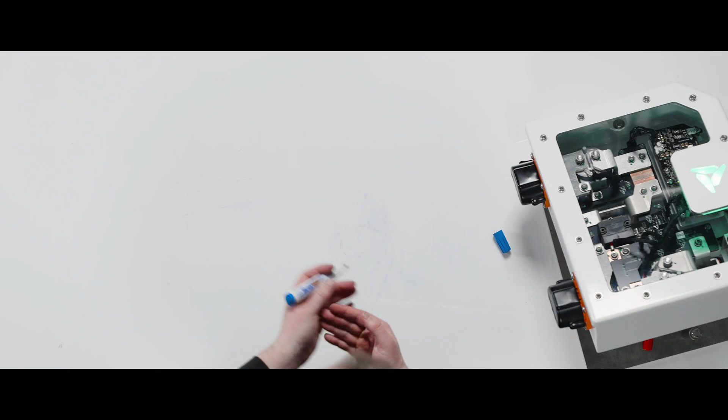So if we're to talk about today's most common fuels used in industrial markets, that's diesel. Diesel has an energy content of around 13,000 watt-hours per kilogram. It's a fantastic fuel, one of the most incredible substances in the world today because of this incredible energy density. The very best lithium-ion batteries that exist today at a cell level, not even accounting for the weight of the battery pack and everything else around it, is around 250 watt-hours per kilogram. This is an order of magnitude difference in energy content.

It's huge, nearly 50 times lower than what we get out of diesel fuel today. That's the first most important thing when we think about fire safety: the energy density of diesel fuel versus batteries is dramatic. That means that if something goes wrong with a tank of diesel, it's going to create a much larger thermal event, thermal incident, than an equivalent amount with a battery pack. Some of the big misconceptions with battery packs are that they're very difficult to combat the fire, very difficult to put out, and I'm going to speak in detail as to why that is, and in some cases it can be true if you deal with the fire in the wrong way.

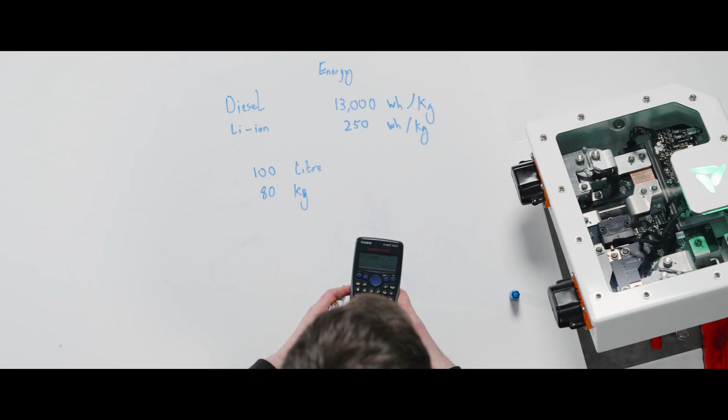So if we just use a simple example of an industrial machine with a 100-liter fuel tank, that's approximately 80 kilograms of diesel. Multiplying 80 kilograms of diesel by 13,000 watt-hours means this 100-liter tank of diesel has basically got 1 megawatt-hour of thermal energy. That is a huge amount of energy in that system in comparison to what a battery could carry.

The difference between the diesel fuel and the battery is that the firefighting methodology we use for diesel is very different. So by suppressing a diesel fire by covering it in a foam or blocking oxygen to it, it's able to put this fire out and maintain it in a completely extinguished state.

The difference with a battery is that in some cases it can be self-oxidizing. It's able to generate its own oxygen internally and continue to burn, but the most overlooked piece is that it's electrical energy. There is electrical energy stored inside of this battery cell, and that means that you've got multiple modes of thermal runaway, multiple modes of fire generation, multiple modes of heat generation.

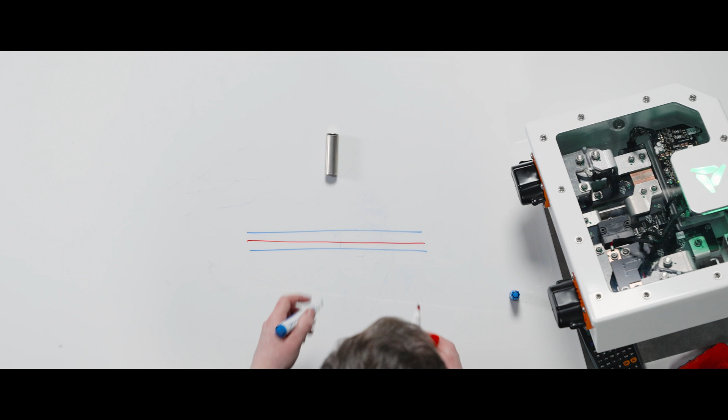So if we're to look through what actually happens in a lithium-ion battery to cause it to go on fire, it's quite a nuanced set of things that happen. So inside of a cylindrical battery cell, as we've shown in previous videos, it's basically something called a jelly roll. It's basically a plus and a minus, and they're separated in a flat sheet. And then this flat sheet, in the case of this cylindrical cell, is wound up into a single loop. So that will enable you to have a functioning battery.

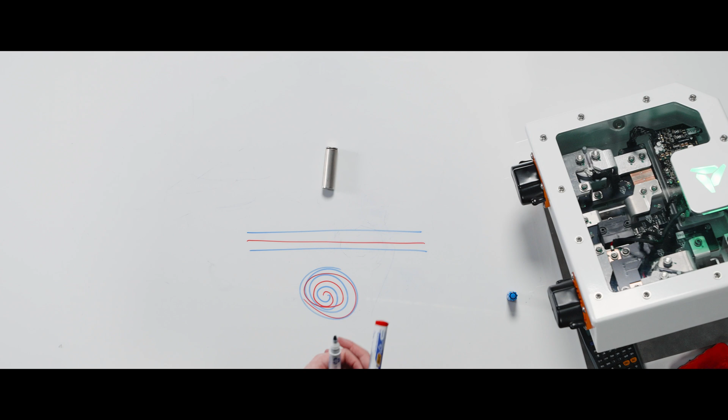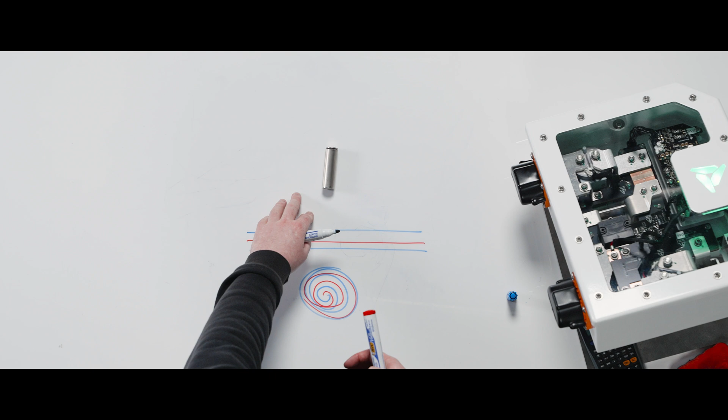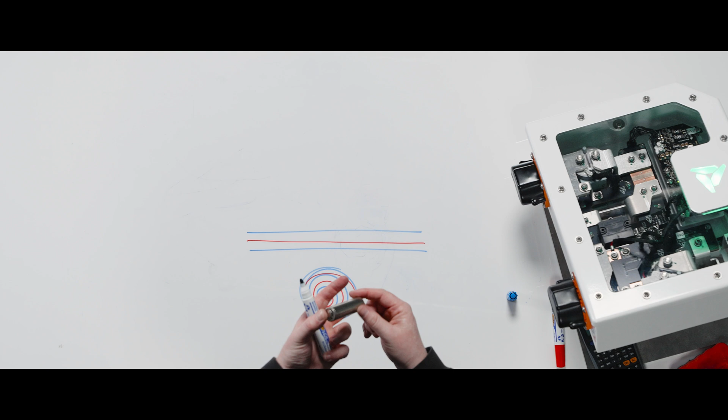This is containing electrical energy, and then similarly, this red separator is a plastic. It's a little polyethylene separator material. So a plastic can burn. It's like a hydrocarbon. You've also got electrolyte in there, a small volume of liquid that's quite combustible. It's almost like an organic liquid, like diesel, but only a small few droplets of it. So within the battery cell itself, there are things that burn. It's like there's almost a small bit of oil inside of the can before you even consider all of the electrical energy.

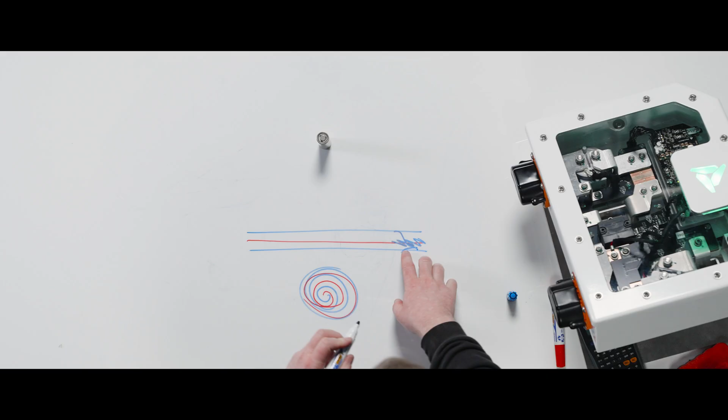So the electrical energy is the second piece here, is that if this battery cell were to catch fire and you're able to break down the separator and cause these two sides to touch, you're going to create an electrical short circuit. An electrical short circuit can generate a lot of heat because the current flows through resistive heating to build up temperature very, very quickly. So you can get multiple things taking place at once.

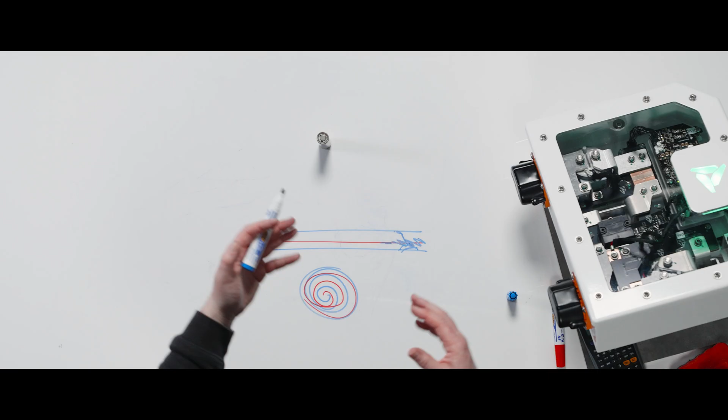You can get electrical shorting generating heat, so it won't generate a fire, it will generate heat and burning. That heat and burning will cause the separator and the electrolyte to catch fire, which then causes venting and gas generation, which causes more separator to fail and more electrical energy to be released. So when all of these factors come together, you can and do get thermal runaway. You do get venting of battery cells and fire.

There's a lot of different technologies on the market today to try and reduce this. And some of the things to consider is that even within this plus and minus, or your anode and your cathode, the materials that are used there have different stabilities. They're chemical compounds. If they get above a certain temperature, they break down, they decompose into other materials that are often flammable. So when we talk about different chemistries, this is very safe, LFP doesn't go on fire, LTO, you can put a nail through it.

These chemistries, these cathode chemistries, have different characteristics. They might have a much higher thermal stability before the cathode or some of the other components break down, which means they need to reach a higher temperature before they burn. The electrolytes they use might be less flammable. In fact, you can get non-flammable electrolytes. The separators that are used could be different. They might be inorganic electrolytes, inorganic separators. They might be ceramic separators that simply don't burn.

So by tweaking all the aspects of these battery cells, you're able to change their behavior in thermal runaway and fire. But the thing is, with all of these battery cells, they still have electrical energy. They can all fundamentally create electrical heating by releasing their energy. Certain cells, you might have seen that you can drive nails through them. That's because the current conductivity through the cells is not so high compared to others. They can't release the energy quick enough to generate that high heating effect and burn the other materials.

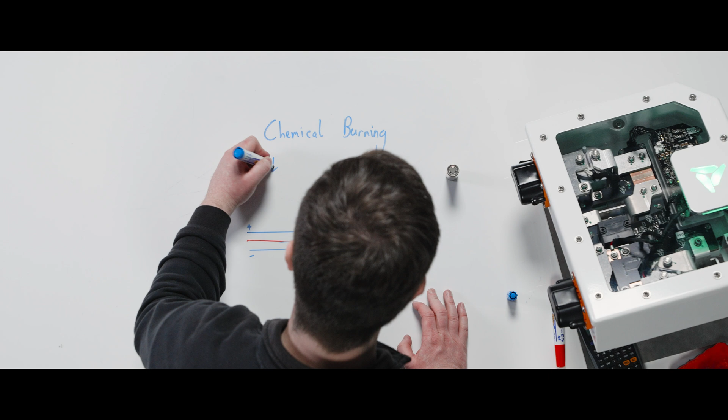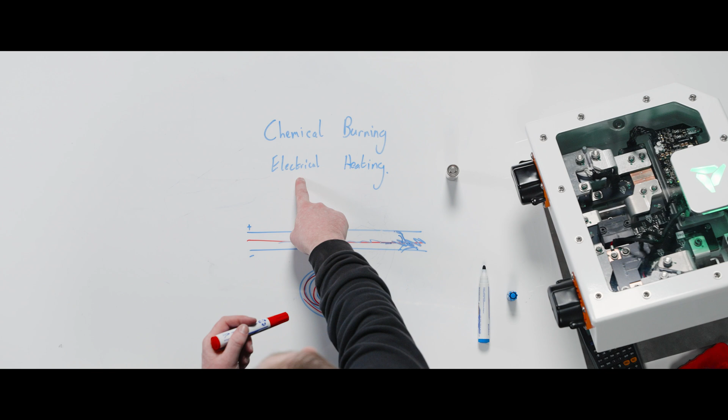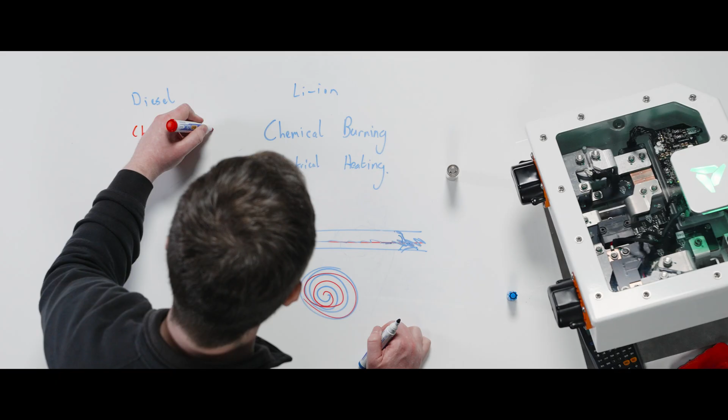But I have to be absolutely clear, given the right conditions, you can make any chemistry burn, thermally run away, or create a fire event. So understanding these two different effects inside of a battery, there is the chemical burning, there's electrical. The second one is the big difference from diesel. So when we talk about lithium-ion batteries versus diesel, diesel's got chemical burning, but it has no electrical heating.

The electrical heating is the source of most of the confusion on the market today. It's the source of most of the very interesting news stories and firefighting mistakes, is that electrical heating and the fact that the energy is always there, always on, can lead to a very key behavior that needs to be mitigated.

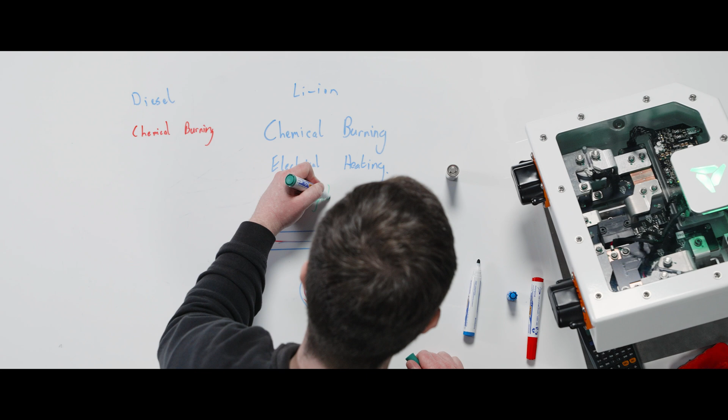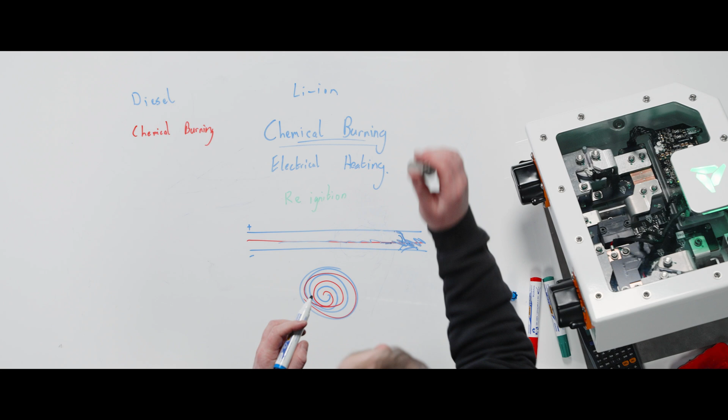And that key behavior is reignition. So the important thing to think about here in my scenario of, if you're able to cause chemical burning of the battery, you can extinguish that burning. You can put it out with any standard conventional method. You can put water on it. You can block the oxygen, assuming it's not self-oxidizing, and the battery cell will go out. The fire will stop, no different to a diesel fire.

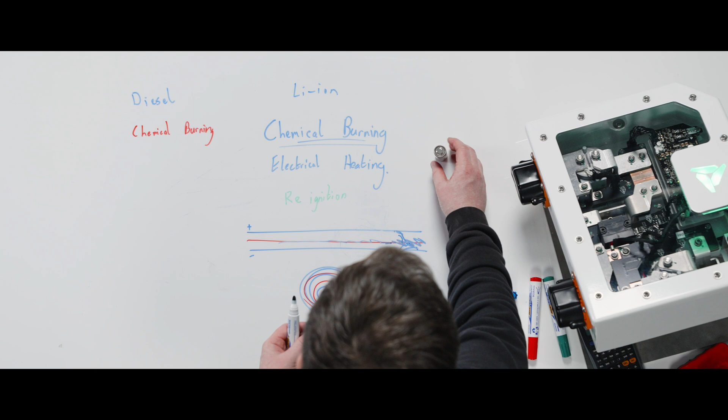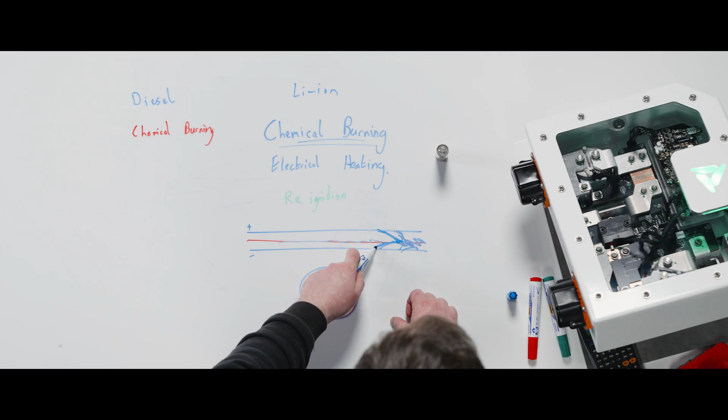The thing that you possibly have not achieved is there's probably still electrical energy inside of this battery cell. If you still have electrical energy inside of the battery cell, and you've still got a compromised heating path, you've put out the chemical burning fire, but the electricity is still flowing, creating heat effects, and that might be enough to reignite a chemical fire either seconds later, minutes later, hours later, years later, potentially, in a very latent defect. So that's something that you've got to be careful of with battery fires, is that you need a form of permanent suppression to ensure that these systems can be made safe.

So that's what we're going to talk about next, is first responders, what you should do, how you tackle battery fires. So if you were to come across a vehicle, a battery, a system, this is based on the best practices that we do here at Xerotech. So there's a lot of information out there publicly. There's a lot of different scenarios, but what we advise our customers to do, and the Xerotech philosophy, is based on real fires, real testing that we have physically done ourselves. I personally have fought multiple lithium-ion battery fires during design, development, and intentional abuse tests. So these are methods that we have directly seen to work and be effective.

And the real simple case of how you deal with every battery fire, we have one rule: put it under water. This is the simplest, most effective way to deal with a lithium-ion battery fire. In every case, irrespective of chemistry, irrespective of everything else, this is the permanent solution to make a system safe. Everything else you do combating a fire should lead to this end point. The end point for combating a battery fire is submerge it underwater. Get the system underwater. That will put out the battery fire. That will suppress it. It will make it safe for days, weeks.

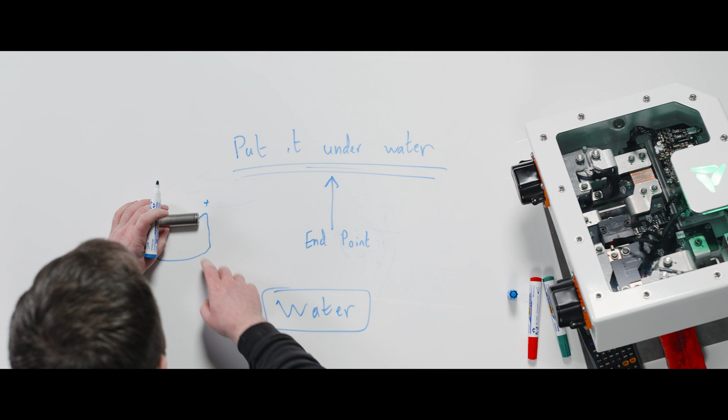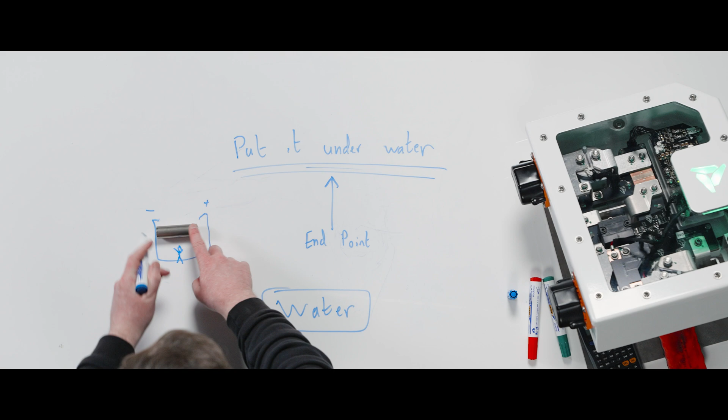A battery is what's called floating. It's electrically floating. The only way you can get electrocuted from a battery is you've got to touch from plus to minus. You've got to join these two loops together. So if you've got a fire hose, you would have to somehow create a loop where you're in the middle of it and join these two things together. That is incredibly hard to do for a floating battery system.

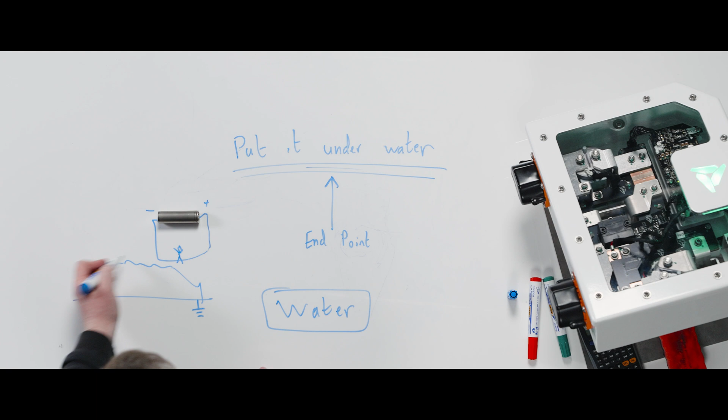The reason you don't spray water onto an electrical panel is that you don't need to connect the second half of the loop. Half of the system is already grounded. So you're standing here on the ground. And that means that if you've got an electrical panel here, it's got one side that's going off doing something and the other one's connected to the ground. So if you spray water onto that electrical panel, you're creating the loop and you're in the middle of it.

So that's why you never do this with a ground-tied system or a system that's not floating. With a battery, it's very hard to achieve that. So in this case here, if you spray water on the battery, you will create a joining of the circuit, but you're not going to be a part of that circuit. It's going to be inside of the battery box. It'll be internally shorting and dissipating its energy. And that's actually part of the mitigation strategy for putting it under water. You leave it under water.

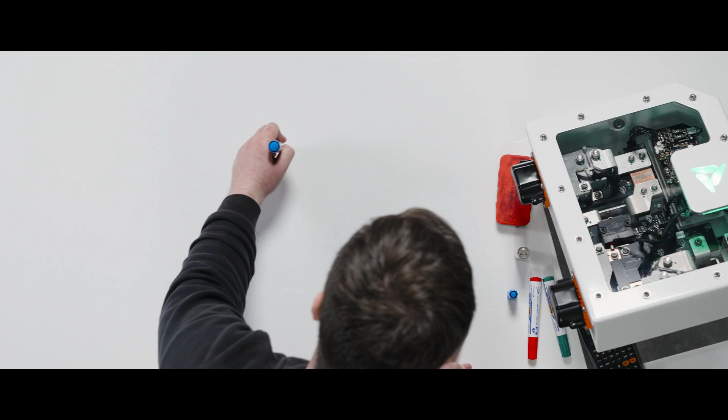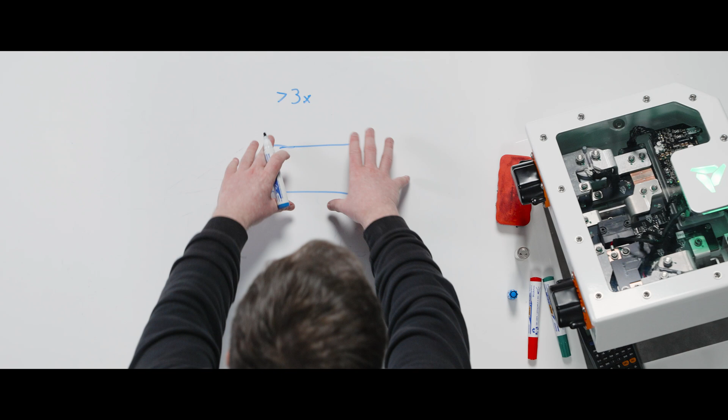So if we're to come back to a practical solution of what you do and how you put out a fire, we would recommend as a general rule, if your battery box is a certain size, put it in a volume of water that's at least more than 3x the size of that. And there's a number of different reasons for this: if you have it in a small pool of water, there's not enough thermal mass in that water to keep the fire quenched down. So you want to have greater than 3x the size of the pack, and you need to think about practical solutions of how you'll do this, especially in a field application.

And oftentimes these are achieved with metal containers. Waste refuse skips are some of the most effective solutions that we would recommend for customers and early integrators: have a standard metal refuse bin, a large skip, put the pack in it and flood the skip. Other effective solutions are large roll-on, roll-off skips that can be lined with a tarp to basically create a swimming pool, and putting the packs inside of it.

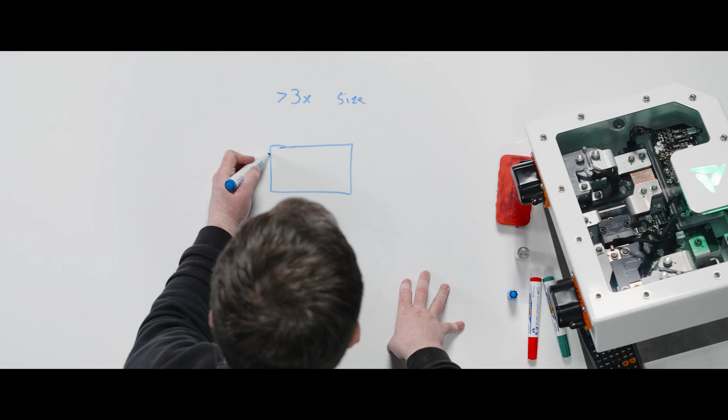By spraying water on the pack, if it's venting or flaming or whatever the situation might be, this will knock down the flames, but it's likely going to be temporary. You have a high risk of reignition by just externally dousing a pack with water. But it'll buy you enough time to get it somewhere more safe. So that's the second piece with lithium-ion battery fires. One of the most important things is early intervention. The worst thing you can do is let it burn more and more and more. So if there's an opportunity that this is a recoverable situation, you want early intervention.

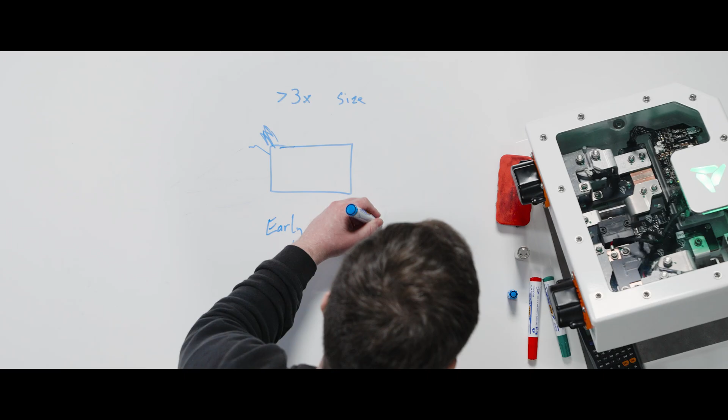This is incredibly important. Within batteries, we're very lucky that the fuel is not a liquid fuel in one tank. A diesel tank, like we spoke about, an 80-litre or 100-litre diesel tank with 1 megawatt hour of energy, is one volume of diesel. If it goes up in one place, it's very hard to segregate it. If a battery is designed well, you've got lots of little diesel tanks. For example, in a 1 megawatt hour system, that's probably 10, 20, 30, 40,000 individual battery cells. So that 1 megawatt hour is divided by 40,000 times. So that means that if you can intervene early, you can stop the domino chain reaction within the pack.

But again, spraying water on it will only eliminate the chemical burning. It is unlikely to stop the electrical shorting, which can reinitiate chemical burning. And the problem here is that water does in fact promote further short circuits. So the water is in some cases going to make things ultimately worse for a short period of time. So water is what you do at the final point. You know that you're committed. This pack is going to be end of life. So you're dousing it with water with the intention of taking it out of the system, putting it into a skip of water.

Some other considerations for practical firefighting of battery systems, particularly in large field vehicles, is back to our fundamental rule of thumb of get it underwater. We ideally want to take the white box out of the vehicle, put it in a skip of water, but for some systems that's not possible. You could have a massive system with 30 battery packs. How are you going to do it in that case? So some battery systems, like ours, we've designed in abilities to spray water into the pack. Can we flood the pack internally?

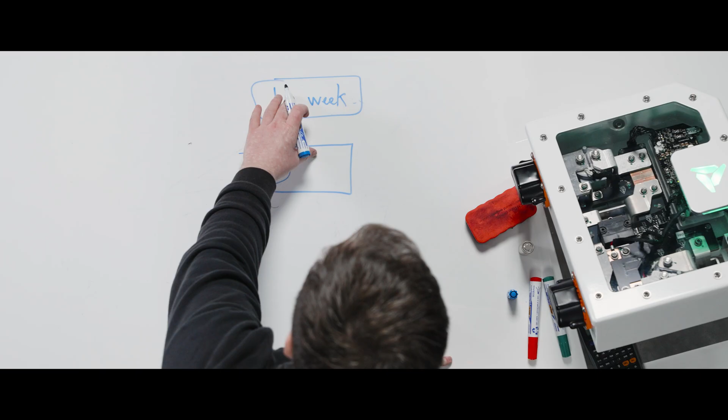There's a lot of other tricks that you can consider if you're trying to move failed battery systems. That's another area that's not well spoken about in the market. Some of the recommendations we have is submerge a pack in a skip of water to make it safe. And then afterwards, when this pack needs to be transferred, we recommend putting them in sealed plastic, heavy-duty tarp bags so that they can be underneath water while they're being transported to their final end-of-life location. So again, keeping that chain underwater provides the maximum level of safety, reducing the risk.

And the reason water is so effective compared to any other solution on the market is the thermal mass of water is probably twice as good or strong as any other material known to man. Water is the most effective firefighting material that exists, and it's widely available, well known. We strongly recommend the use of water in combating battery fires.

One of the other considerations with lithium-ion batteries and a watch out is when batteries fail, they don't typically start by catching fire and burning. They typically vent. And what we mean by venting is they vent a hot gas. And what that is, the battery cells start to decompose. The electricity inside of them is cooking the liquid electrolyte, turning it into a combustible vapor.

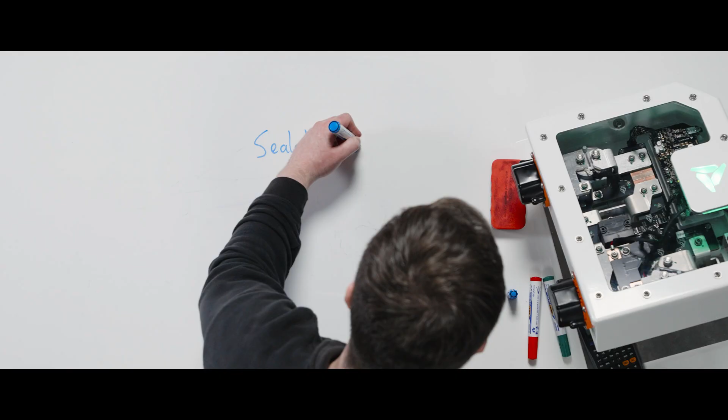A very dangerous situation that you can create when you don't understand how to combat battery fires is taking a battery and putting it into a sealed compartment. This is not a good idea. There's a big difference between putting a battery in a sealed compartment and putting it underwater. The water will knock down the thermal runaway. It will stop the gas generation. It will stop the fire. It will cool down the heat.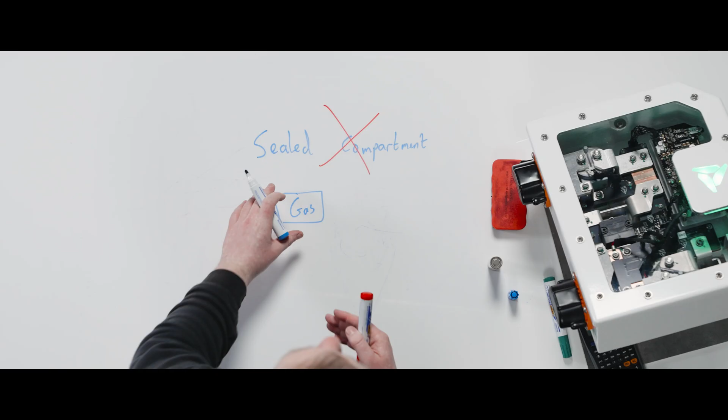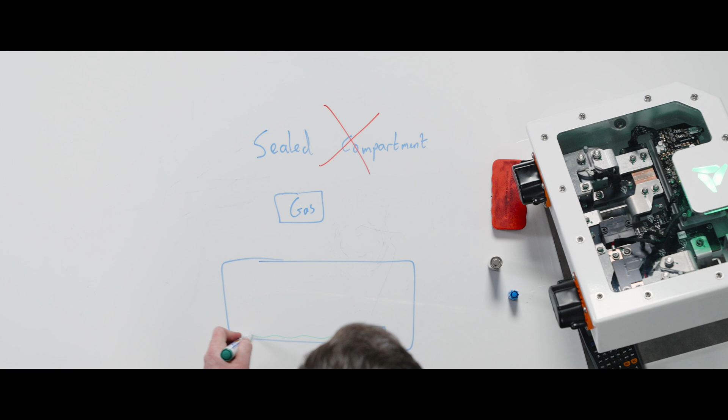When you place a battery in a sealed compartment, and we've seen this several times in container situations, if a battery is in a container and it's venting, you build up gas, and this gas can be combustible. The risk you have here is if you achieve in your gas volume, say in a shipping container, and you've got an individual pack, as this starts to engulf the whole container in gas and build up a certain concentration level, you build up quite typically a lot of hydrogen inside in this space.

And if you have a spark ignition of that hydrogen, you can get a temporary ATEX or explosion hazard. It'll be a sudden pop, hydrogen bubble pop, that will in some cases overpressurize the container. It could swing open the doors of the container or pop the lid of the battery box.

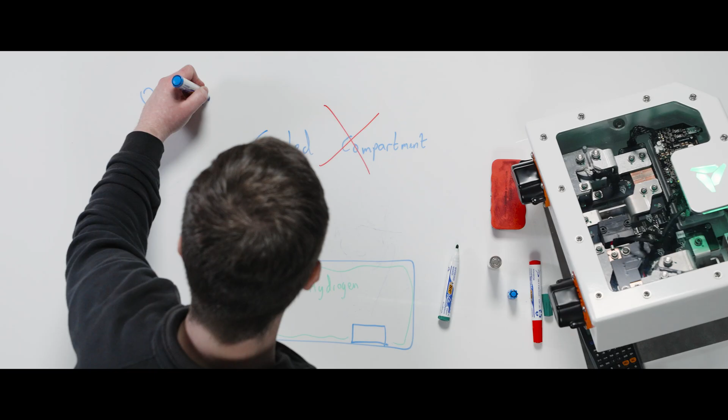It's very important that if a system is failing, you want to make sure it's in open vented air. So as part of the chain of how you deal with these issues, you want to get it outside if this is possible. For example, in a production environment, you want it in an outside area. You want to be keeping the smoke, gas, and fire generation down. So water on the pack. And then the final piece is submerge.

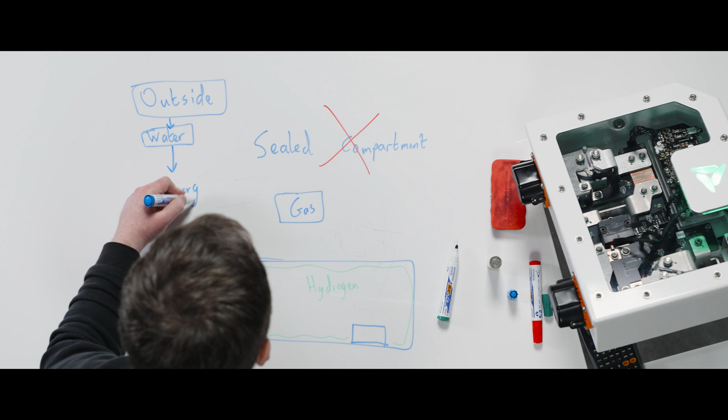We strongly recommend never ever to store failed battery packs in sealed enclosures or sealed containers. The safest solution is to leave it permanently submerged and recycle it, or else leave it in open air and cover it with some sort of fire blanket or protective covering, but not something that can create a pressure vessel scenario.

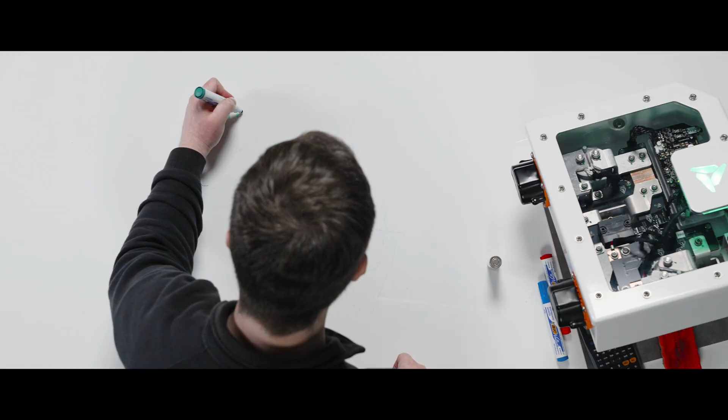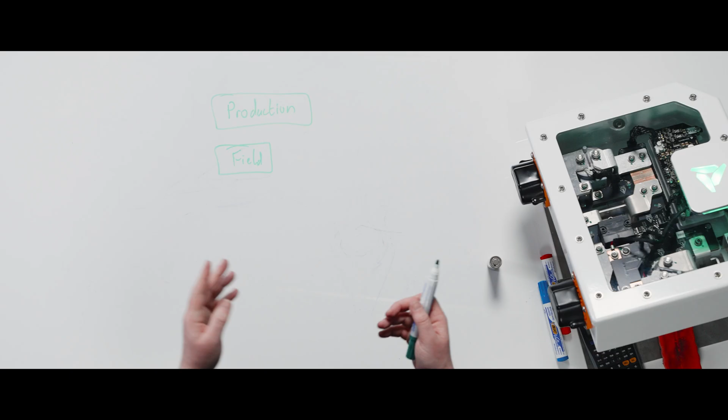So to summarize, you've got two major scenarios where you'll encounter battery fires. You could encounter a battery fire in a production type environment, if something goes wrong, if a battery pack is dropped on the production line or a forklift operator drives through it or something like that. And the second one is in the field. In a production environment, the solution is generally very straightforward. Get it outside, get it underwater, use water as a containment.

In a field application, it varies very widely on what to do. Typically, if it's a smaller size vehicle where the battery is just one battery in a vehicle, you may want to douse the battery with water so that it can potentially be removed from the vehicle, contained enough to make safe. Potentially you can partially submerge a portion of the vehicle if this is practical. For larger systems, depending on how the OEM integrates it and designs it, you might design in cooling ports that you can flood the pack for first responders, if that's the most sensible thing to do.

So we've talked quite a lot about how to combat a lithium-ion battery fire, but one of the most important things to look at, particularly for Xerotech battery systems, but not just ours, is there's a lot of interesting things that these battery packs can enable, particularly in markets that experience very adverse or very abusive conditions. One of the big advantages of battery packs is the small units of energy. These small units of energy mean that these systems can oftentimes withstand a high degree of damage and still be somewhat operational. And this is very interesting for some markets.

So in those markets, when you've got a fire in the system, for example, with a Xerotech battery system, there's a very high likelihood we're going to passively suppress that fire and you can maintain operation. But even if it is a runaway event and it continues to happen, this is likely happening over a period of time. It could be minutes, it could be hours, it could be even longer than that. That gives the user a huge amount of safety benefit to exit the vehicle, to complete their mission, to continue the use case, to put the whole system into a safer mode of operation. That's one of the things that's overlooked on battery systems.

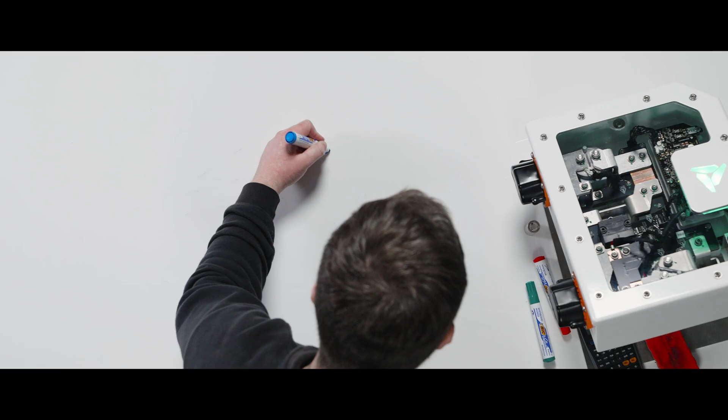But how do these things actually start in the first place? You can generally categorize it into two categories. You've got internal and external. The internal one, the mechanisms are always the same. You've got to generate heat. If you generate heat either through chemical methods or electrical methods, that's going to ultimately lead to fire given the right conditions. So internally generated faults are always initiated electrically because there's no way to internally generate chemical fire. So internal faults could be manufacturing defects, which are incredibly rare and uncommon.

The largest battery manufacturer in the world, a major Chinese battery manufacturer, just recently released a large data study of their cell quality. They've estimated that their failure rate of cells is 1 in a billion cells. That is an incredible number for current modern quality standards. So internal faults are incredibly rare within the battery cell. But how it could happen is if you have a defect here creating a small internal electrical short circuit that then causes heating, that causes burning, that starts to burn the chemical fuel inside of the cell, that can then lead to fire.

So we try and mitigate these things through having very high and rigorous standards of cell manufacturing quality. We, as a battery manufacturer, do extensive quality checks to make sure the cells are good. And this is after the cell supplier has done that. Then afterwards, we wrap a lot of safety systems around it to plan for the worst. What if it does go on fire? In our case, we have foam suppression and active suppression and many other features to knock these things down. So the internal faults are incredibly rare.